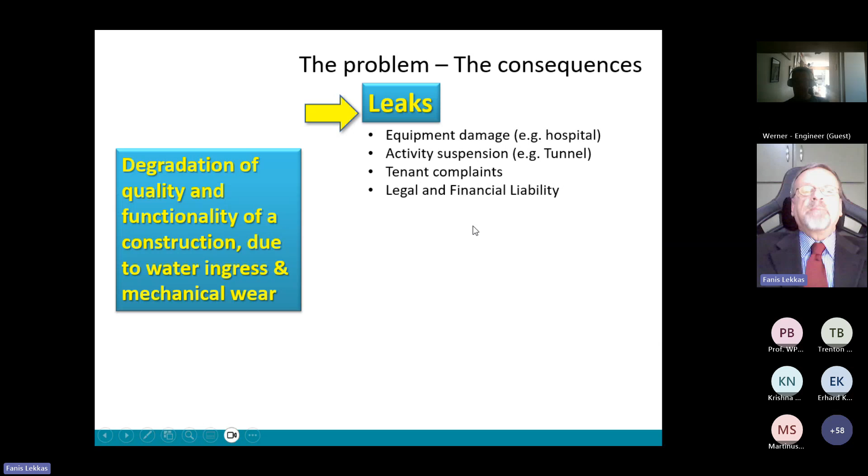A really big problem comes out of the corrosion of the rebar, be it because of carbonization in very polluted atmospheres of metropolitan areas, or chlorides and sulfates coming in on seaside or riverside projects. It is actually the corrosion of the rebar that brings buildings down and puts engineers and contractors to prison.

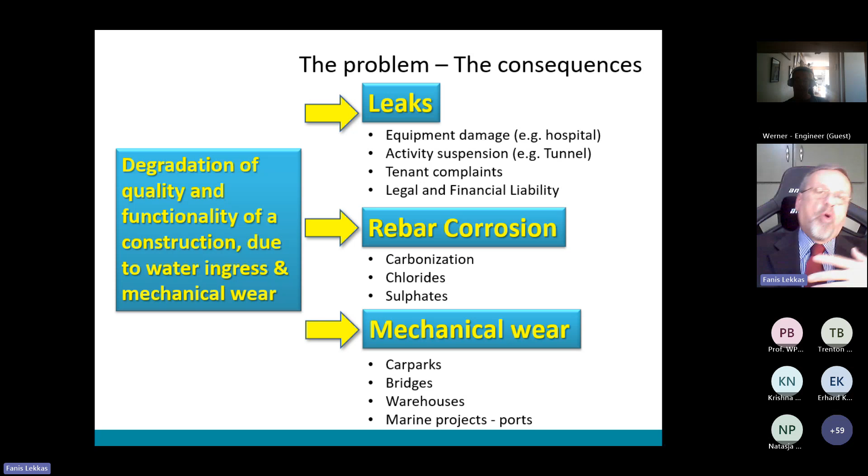And finally, we have the degradation of mechanical wear because of abrasion. Think of car parks, think of industrial warehouses, think of ports and warehouses where containers and cranes are being dragged or dropped, destroying the quality of the surface and damaging, degrading our concrete.

You all probably know that there are three major factors that decide whether our concrete structure is going to be resistant to humidity or not. The first and foremost, of course, being the design mix. So what is in that concrete? How much cement and what type of cement did we put in there? What kind of aggregates are we using?

Are there aggregates that are coming from a river? In some parts of the world, they cannot afford this. They do not have them. So they are bringing in aggregates from the sea sand, from the seabed, and sometimes they do not even wash them. What other kind of admixtures do we have? Are plasticizers and retarders playing an effect? Are we placing concrete in freezing temperatures, so we have to use extra admixtures and so on?

The second, I'd like to say, is the moment of truth: the day of production and placement of the concrete is where most of the mistakes are happening, and they decide the fate of the building. For example, in some parts of the world, it's very easy to get stuck in a half a mile or 1 mile distance for about 2 hours.

Philippines, Manila, for example. So the mixing truck is leaving the batch plant on the way to the construction site, gets stuck in traffic. The driver of the truck is afraid that the concrete will go stiff on him. He presses a button, he adds some water. If you ask him exactly how much water did you put in there, he says, nah, don't worry about it. I've been doing this for 20 years. I know this inside out.

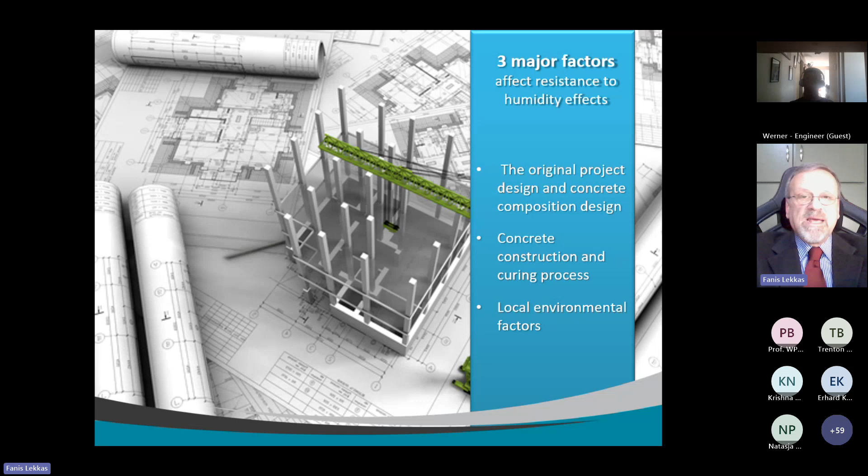Still, we all know that even within the first 24 hours, our concrete is going to be suffering issues that, if we don't plan properly and execute properly, may escalate into problems and then into damage, starting from the very simple and innocent plastic shrinkage or separation of materials, and in the weeks and months to come, between winter and summer and the opposite, we're going to have cracking and shrinkage, and then chemical attack, carbonization and acid rain start to play an issue.

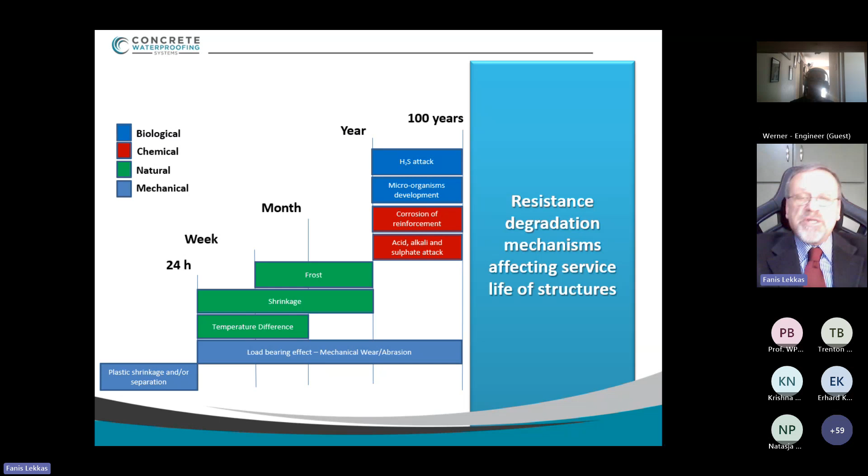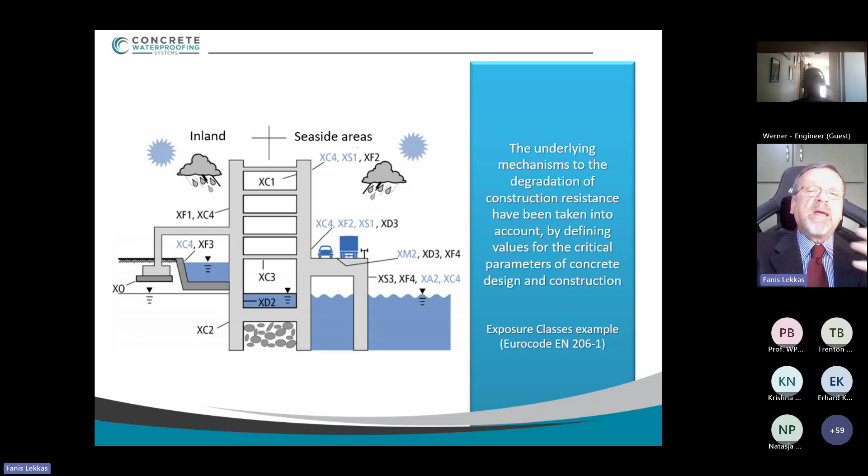This is why the building regulations all over the world, and here we are seeing a slide out of the European building code that is in effect as we speak, have made different provisions about it with classifications of projects, where every type of project, be it inland or by the seaside, above ground or below ground, industrial or residential, a water tank or a car park, is being regulated.

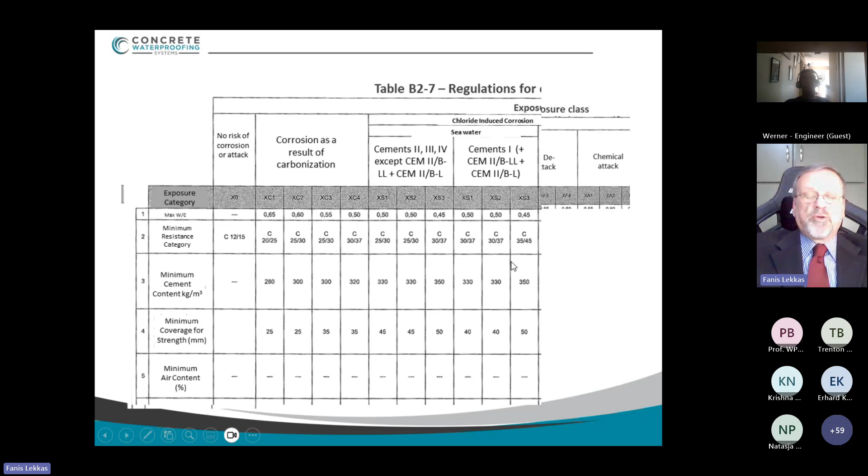Mainly you are expected to give most kinds of information about the project, and then the building regulations will tell you what is the maximum water to cement ratio that you cannot go over, what is the minimum cement that you should not go under, what should be the minimum cover in order to protect the concrete. And we are doing all this. Why? Because we want our structure to achieve a maximum service life.

So let's say that we are designing a hotel or a hospital and we expect a service life of 50 years. What does that mean? Does that mean that it's acceptable for my building on year 51 to die on me and then we have to throw it away and build another one? Of course not.

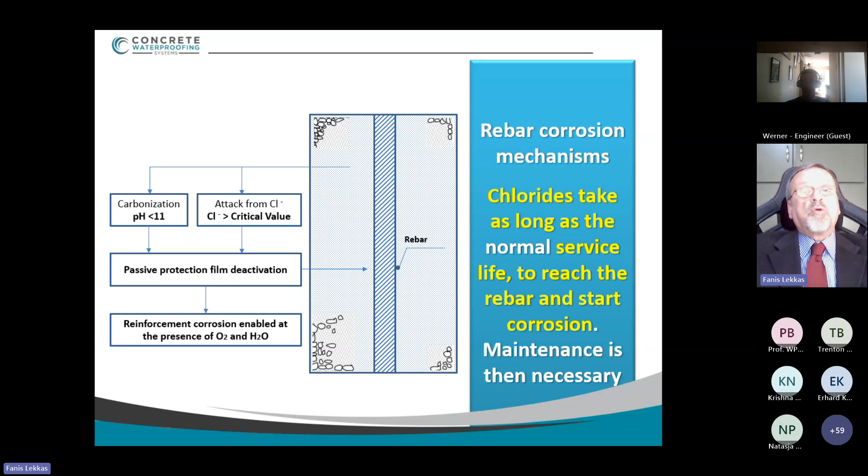It means that we anticipate that with the design mix and placement processes we followed, it will take 50 years for soluble chlorides and sulfates to migrate from the surface through the concrete matrix, get to the rebar, deactivate the passive protection film, and then corrosion will start. Which means that if we are diligent property owners, we should be starting to do preemptive repairs.

So if you think that building regulations will more or less designate what kind of cement, water-to-cement ratio, or even the coverage you should be using for a specific project, the only thing left in our hands to protect the longevity of the concrete is by waterproofing it, by not allowing water carrying soluble chlorides and sulfates to penetrate the matrix.

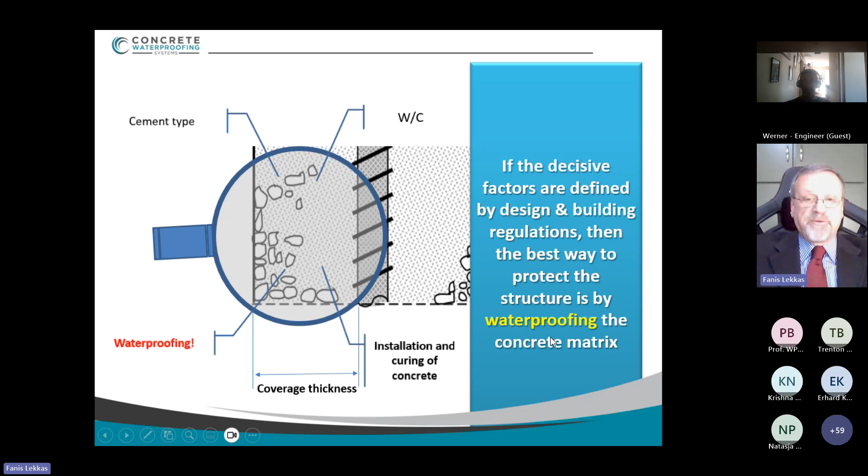So why are we doing all this? To avoid the corrosion. And what do we have in our hands? What are our options? Probably these materials. I'm sure you have all these materials. You've probably used all of them, or most of them, during your work career.

I would really like to know, on a scale of satisfaction between 1 and 10, how satisfied are you? Are you a 1? Are you a 10? Are you a 5? Where are you? Mostly when I speak with people, they tell me between a 4 and a 7. The 7 is really rare. Nobody ever gave me an 8, a 9, or a perfect score of 10.

And when I ask why, they tell me all sorts of things. Usually they talk about service life. They say we install them and in 1 or 2 or 3 years they start leaking. And when we get to the nitty-gritty of this, they're not really complaining about the material. They're complaining about the workmanship of this gentleman, top right, that gentleman, and the other gentleman. It is the workmanship that is causing the problems.

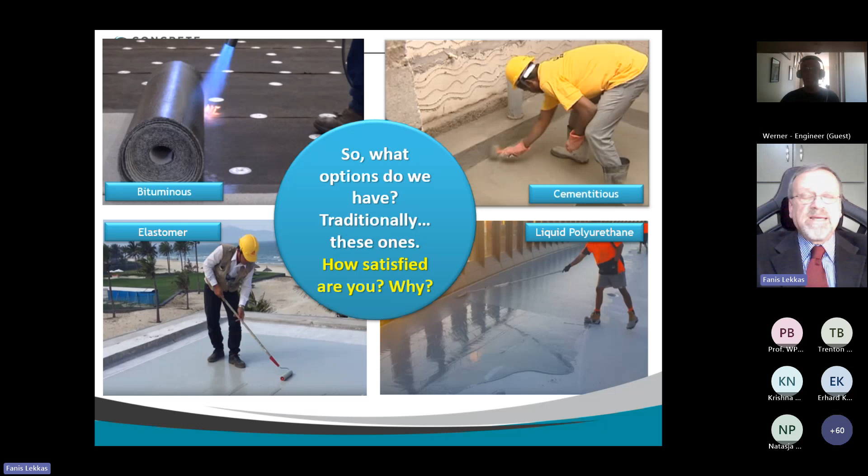Most materials, with the exception of some really bad ones that everybody knows and avoids, could probably last a very long time if installed in a controlled laboratory environment. But they are not installed there. They are installed out in the weather elements, under the scorching sun, the rain, the frost, and the ice, and sooner or later they do fail. So we have to think about what we are going to do when they fail, not if they fail, when they fail. And when they fail, they cause really big problems.

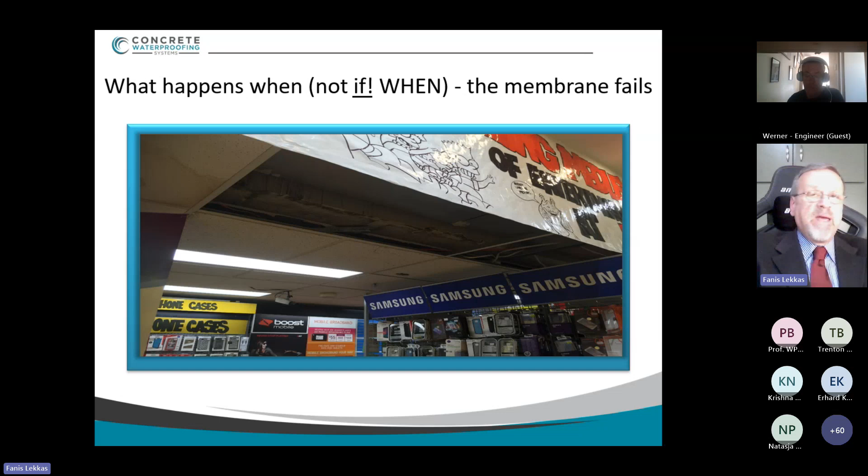For example, this is a shopping mall less than half a mile from our headquarters in Sydney, Australia. They had to close down the mall for 8.5 weeks to make repairs. Imagine how frustrated the shop owners were, losing their income and probably losing their clients altogether, because research shows that when retail customers change the place where they go for their regular shopping, very rarely do they go back.

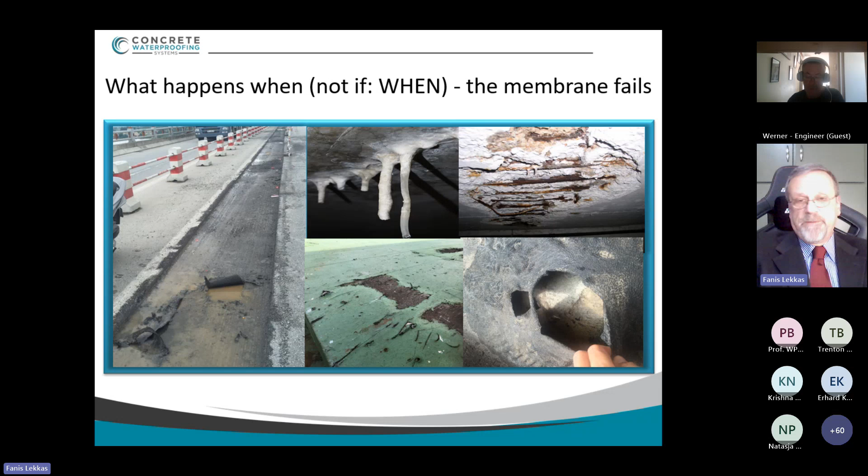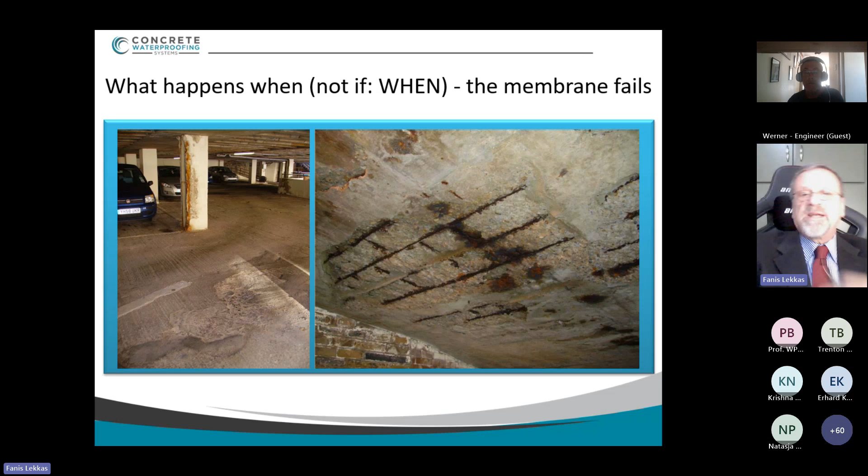So we need to know how we are going to address the issues that the failure of traditional membranes and waterproofing leaves, because after the damage they cause, we still have to repair. You see all these kinds of damages that even after the lawyers and compensations are finished and paid, we still have to pay a lot of money to repair.

For example, if we are talking about a dripping rooftop on a 5-star hotel, which has a membrane, then a screed, and then tiles on top, we have to practically start destroying, by trial and error, different parts of the rooftop to find the leak, until eventually we have to break the whole thing and start it all from the beginning. Then in 5 or 6 or 7 years, you have to do it again, and then again.

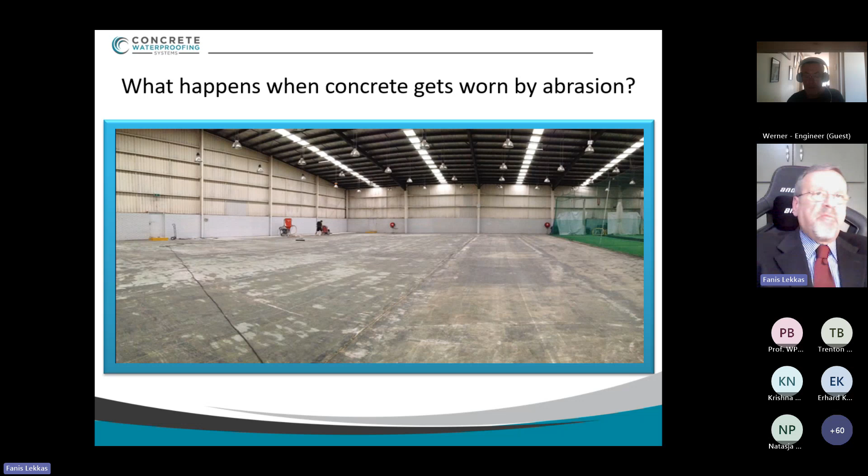So as engineers, we say come on, there must be a way that we can do it better. Or take industrial warehouses, where gradually the surface of the concrete gets degraded by abrasion from forklifts, trains, cranes, trucks, moving traffic, and tools. We need to find materials that we could install only once and never have to pay for again.

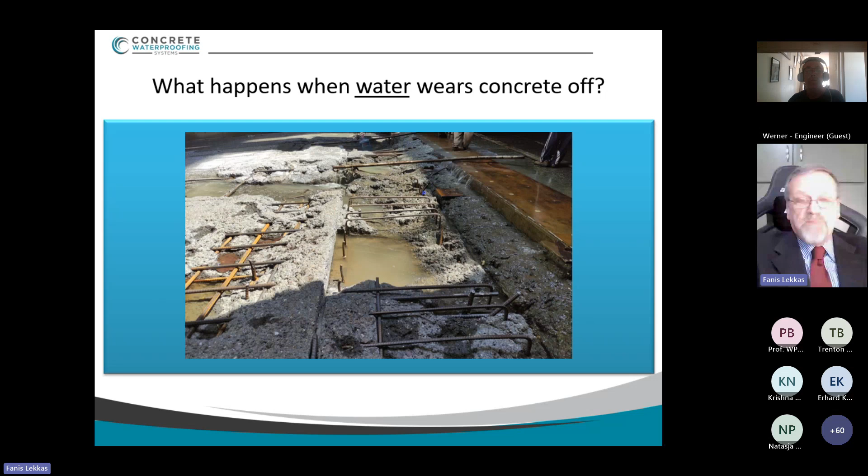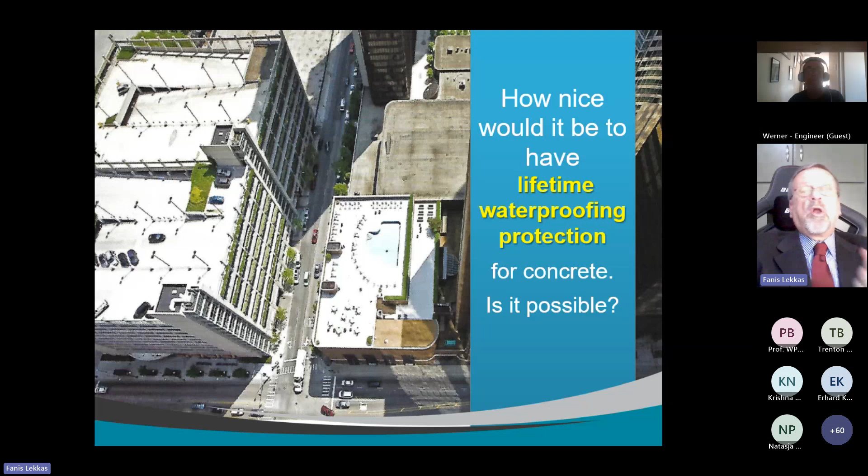For example, this is a spillway on a water dam somewhere in Pakistan, done by a very well-known big construction company. What you're looking at here is the spillway area, which became like this 9 months into the operation of the building. So we say, come on, wouldn't it be great if we could have technology and products that we only install once, and never ever have to install again, and never have to perform maintenance?

And one of these available technologies today, even available in South Africa today, is what we call BMSS, biochemically modified sodium silicates.

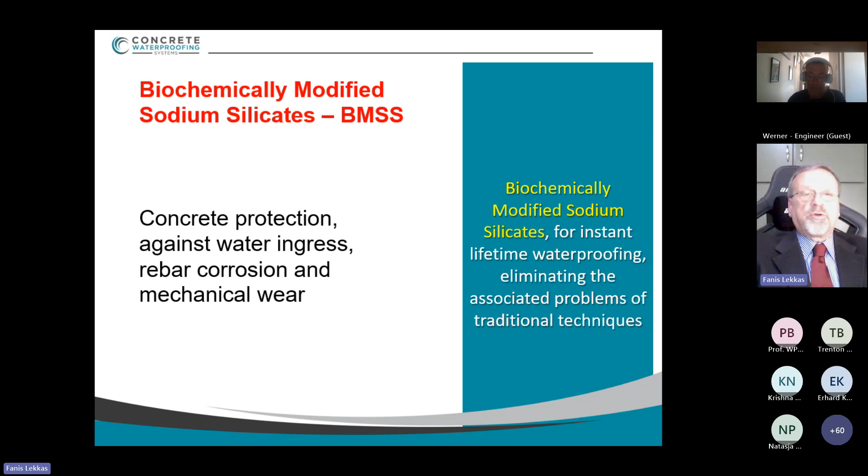Usually sodium silicates are connected to concrete hardeners, something like $1 a liter that you can find around the corner or in every small shop everywhere in Asia. Here we are talking about a biochemically modified technology, which is used not only to arrest the ingress of water, but also to protect the concrete against mechanical abrasion.

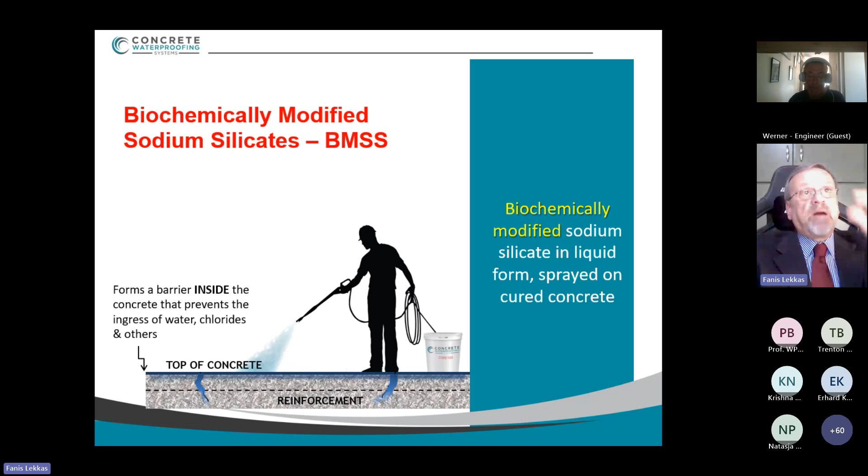BMSS is practically liquid CSH. You can think of it as liquid concrete within concrete. We apply it on dry and cured concrete surfaces, and then we give it time and it penetrates the concrete. It does not stay on top, it's not a coating, it's not a membrane, and certainly it is not a film. It penetrates about 15-20 millimeters of the top surface that we apply it on, and the way that it works is very simple.

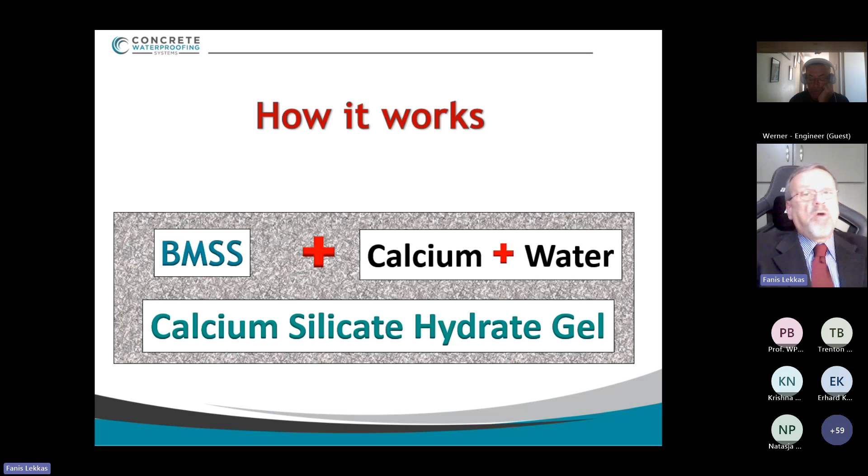It reacts with the calcium, which is already in the concrete, and with simple water that we add by watering the applied area on the day of application, on the second day, and on the third day. And it creates an insoluble calcium silicate hydrate gel. It has the same structure as concrete, which is essentially a calcium silicate hydration product.

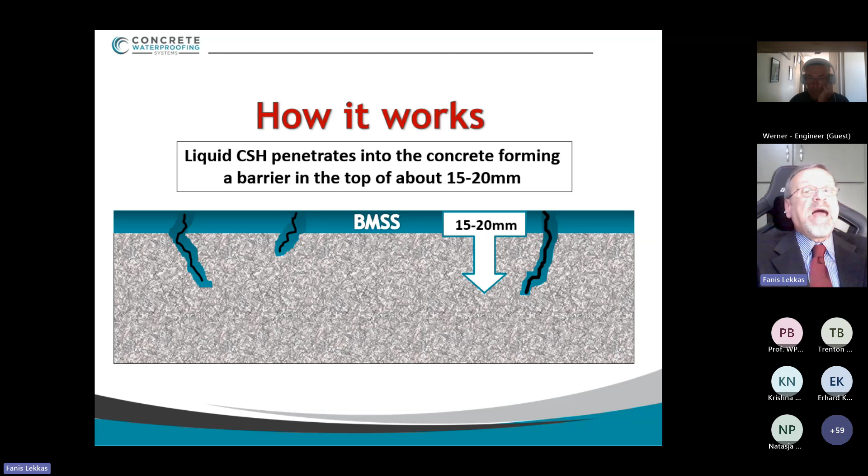What it does is that it seals the porosity of the capillarity of the concrete on the top. It seals the cracks, it seals static cracks which are already in the concrete, and this is all happening inside the concrete and not on top of the surface. The best of those materials can even seal static cracks up to 2.2 millimeters, which is a huge achievement.

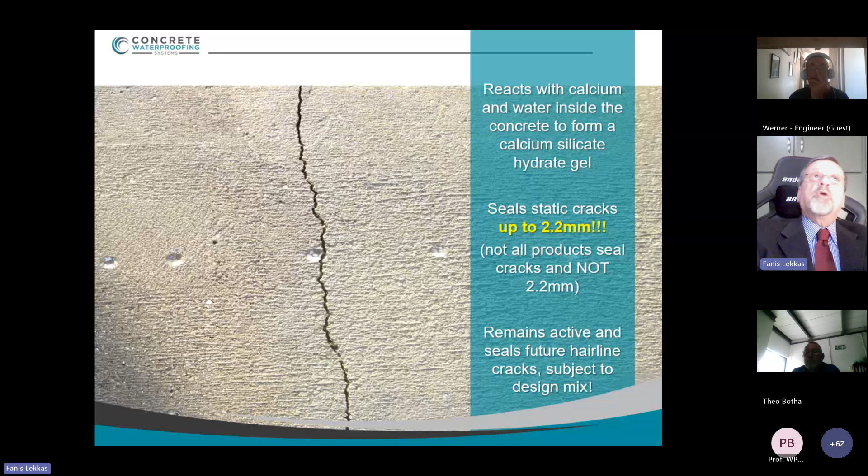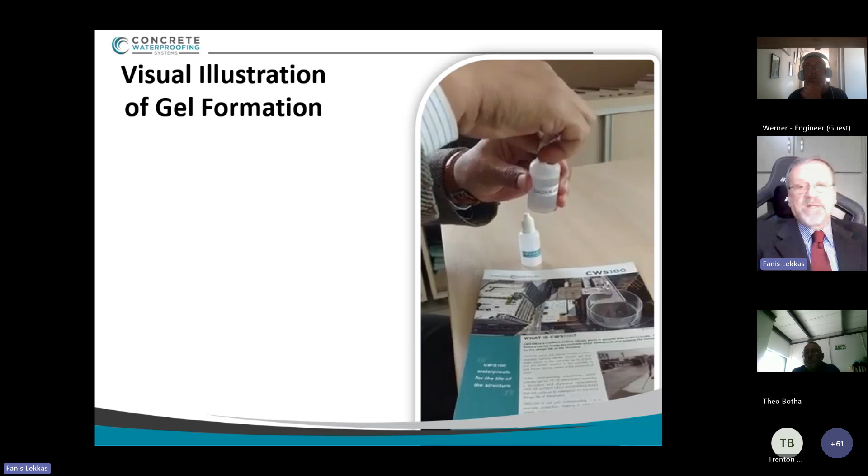Here we have a solution of calcium acetate, some water and calcium to simulate the concrete surface. We put a few drops here in that Petri dish. And then we are going to install the CWS product, which is that demo bottle you are seeing back there.

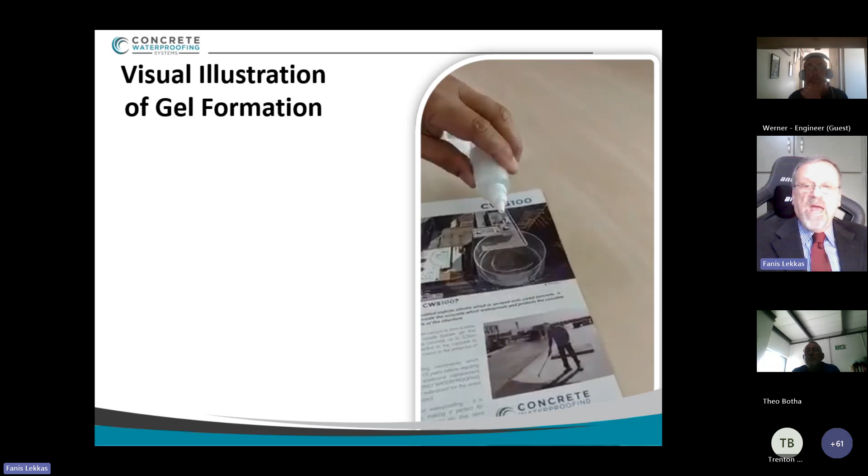You see that these products are liquid, transparent, pretty much like water. The viscosity is pretty much like water. Now have a look. The first drop goes in. Look, 1, 2, 3. You get an instant reaction.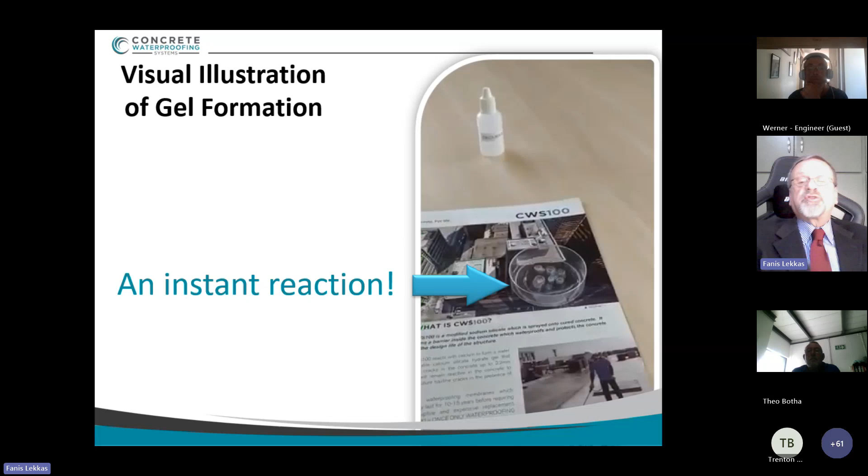The gel formation starts instantly, and the gel starts to grow 5, 6, 7 times its size. Look, in less than 10 seconds, 12 seconds, it grew 5, 6 times its size, absorbing all the available water.

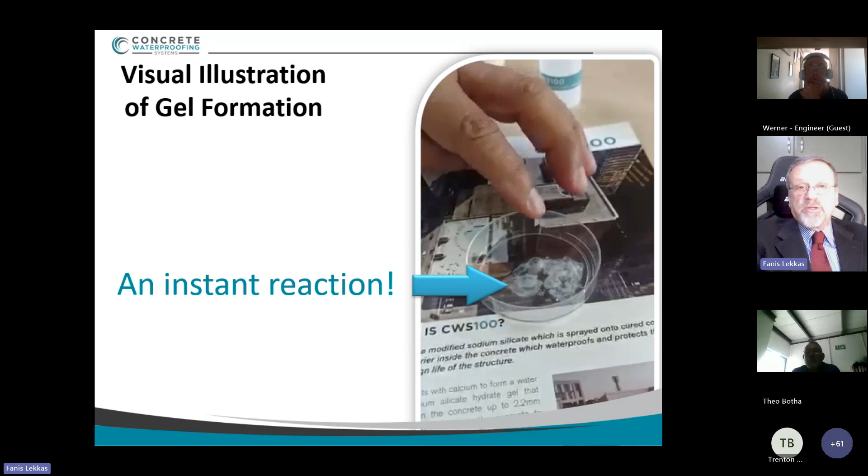This material is not hydrophobic, it's not a water repellent. On the contrary, it is highly hydrophilic material. It loves water. The more you give it, the better it is. However, it's not a magic spray. It has some limitations. It's not a nanomaterial. It is practically a liquid concrete material.

We apply it on structural concrete with a minimum of 20 MPa, well vibrated and well compacted, no honeycombing, no drummy concrete. We apply it when the surface is dry and cured the full 28 days.

Let me explain why. Obviously it has to be dry because, as you saw, this gel formation starts instantly. So if the concrete is damp, is wet, then the gel is going to form outside the concrete without waterproofing it, only staining it badly, and then we have to remove it.

Now, we prefer our concrete to be very well cured the full 28 days because during the curing period, the concrete tends to crack. So if it's going to crack, good. Let it crack all at once, because then we are going to apply this biochemically modified sodium silicate, and it is going to take care of all those cracks.

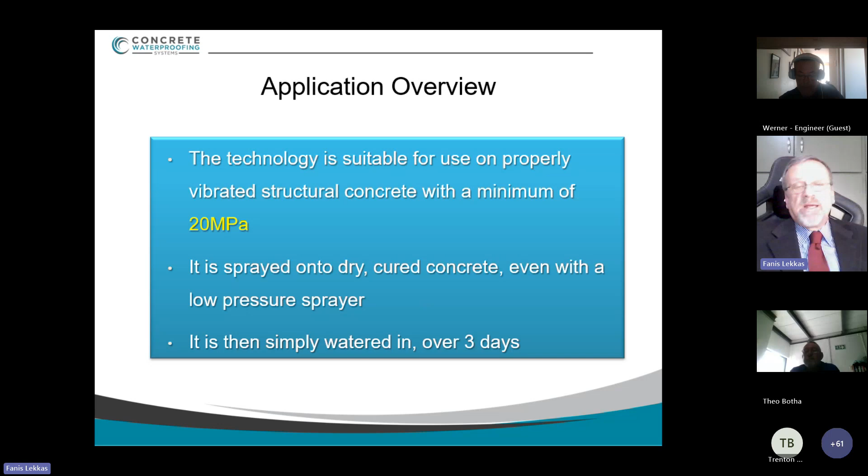After we do the first application, and in the first 1 to 3, 4 hours, our surface becomes touch dry, we water it abundantly for the first time, then the second day and the third day.

The application is very easy. We do not need to use some specific, very sophisticated and expensive equipment. Even a normal backpack sprayer, not even motorized, the one with a manual spray, will do. We apply on the concrete, it becomes wet and then disappears, leaves no trace, does not change the texture of concrete. We start watering abundantly.

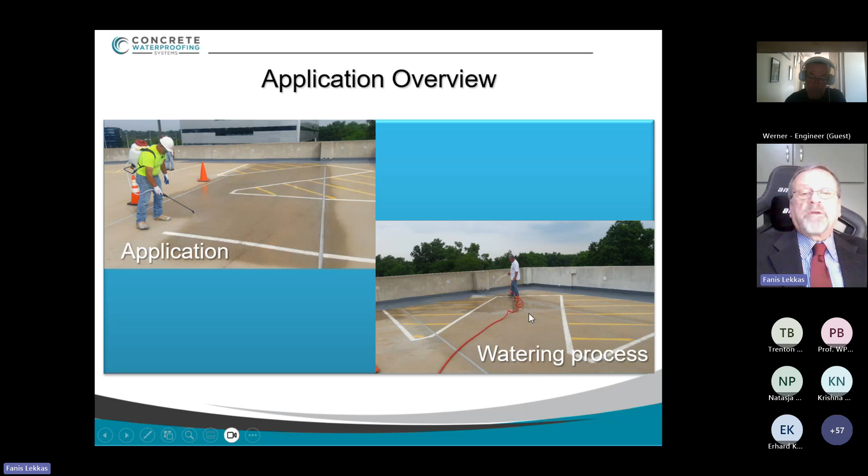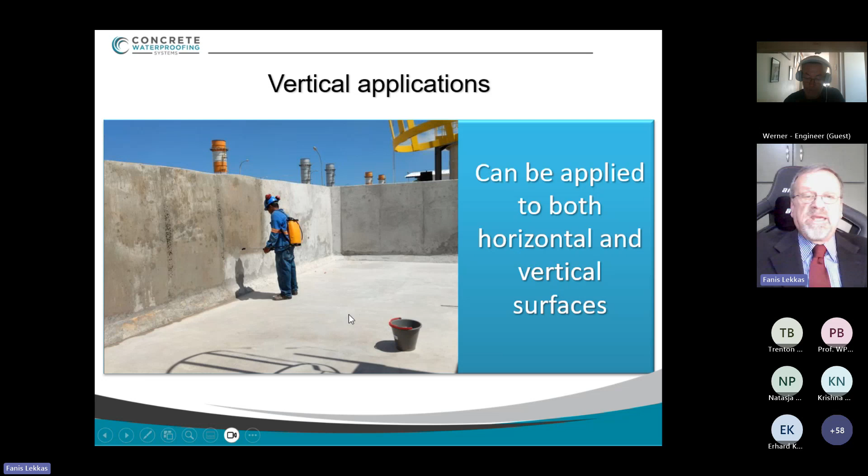This material is absorbed into the concrete matrix because of the capillary phenomenon. So we apply it not only on horizontal surfaces, rooftops, balconies, podiums, bridges, and car parks, but also on vertical applications, for example facades of buildings, water tanks, wastewater treatment, every system where we collect and distribute water, planter boxes like the one we're seeing here, rooftop planter boxes, swimming pools, etc.

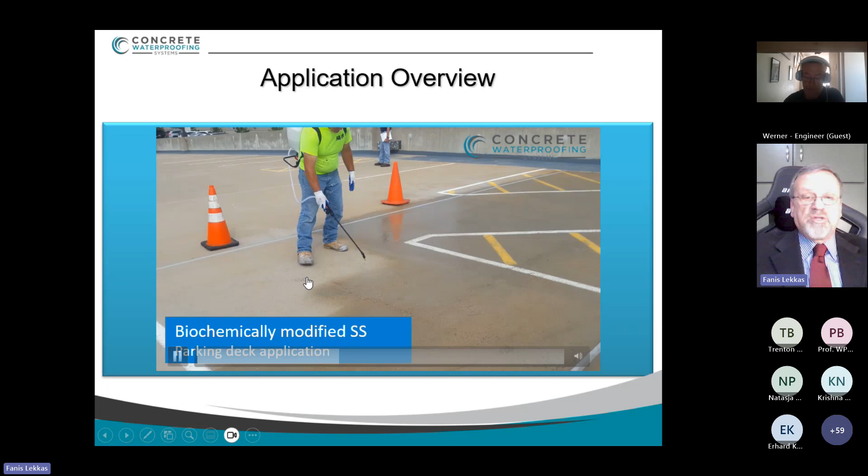It's really very easy to use, and the short video you see here is just to show you how easy it is to apply. You just have to make sure you do not leave any untreated areas. Really very easy to use.

Now, the incredibly valuable asset for contractors is the very fast application. You all probably know that if you're installing bituminous membranes, torch membranes, you need one applicator and one assistant to install, let's say, 50, 60, 70 square meters in a day.

If we're talking about liquid PU, you probably would not be able to go over 100, 120 square meters per day. This technology, used with a normal backpack sprayer, allows one applicator to waterproof 1,000 square meters in one day. And if he's using a motorized pump, he can easily apply 6,000 square meters in a day.

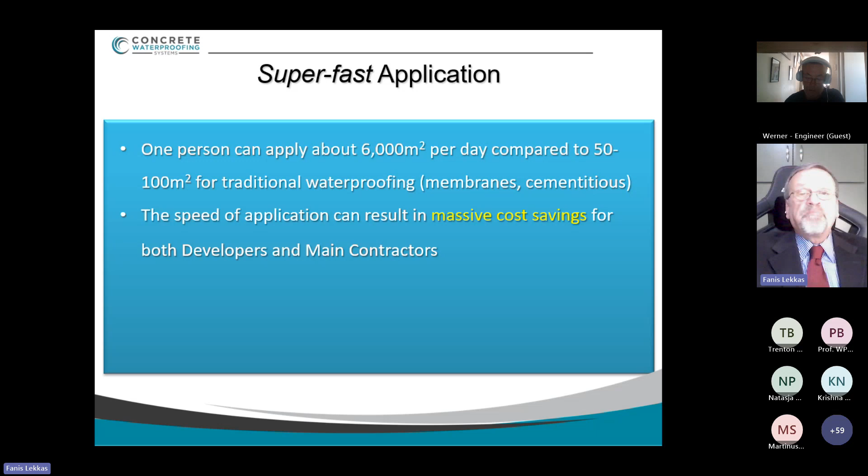Think about the implications. The contractor can now send out one applicator to do the job of 30, in a fraction of the time that 30 people would need.

Look at this example. Let's say we're talking about a bridge project, or a marine project, a port, 100,000 square meters. If you try to do that the traditional way and protect the concrete, it means you have to stay on that bridge for 4.5 man-years. Or you allow one person to do it all in 3 weeks.

Of course, you probably wouldn't send one guy to go there and do it and come back in the year 2030. No, you would still have 10 or 20 or 30 or 50 people working, but those people would account for a total of 1,400 man days.

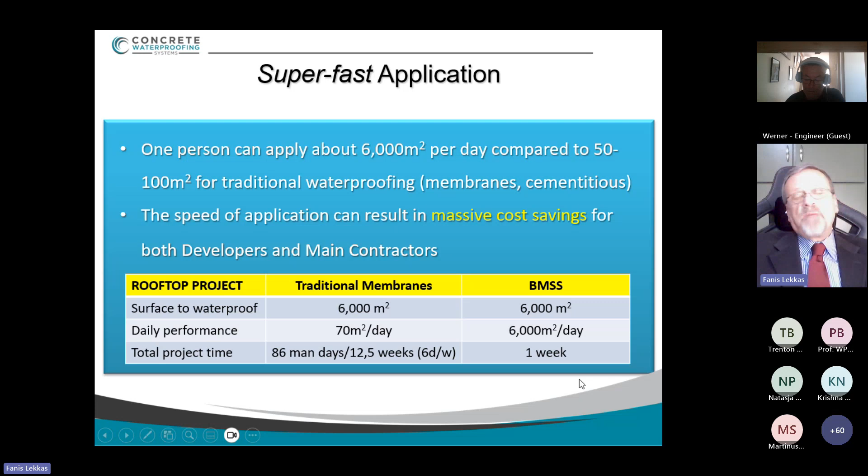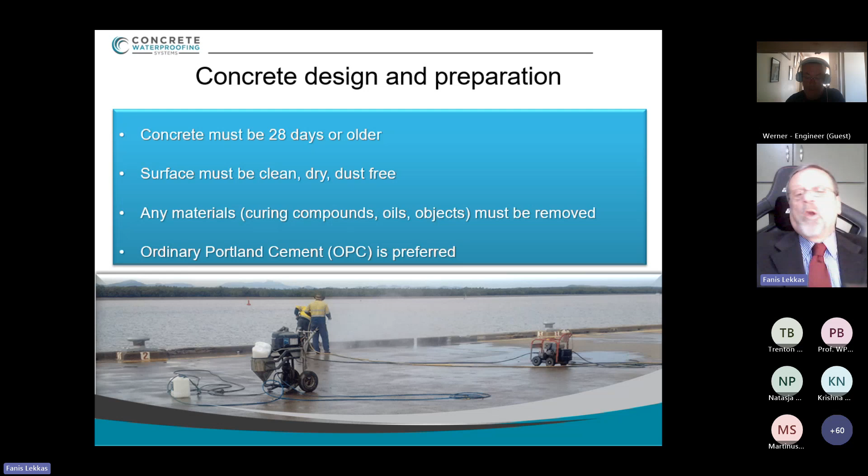So anything that blocks penetration needs to go. We want our surface to be clean, with open pores, free of anything that may block penetration - curing compounds, paints, oils, and other contaminants, they have to go.

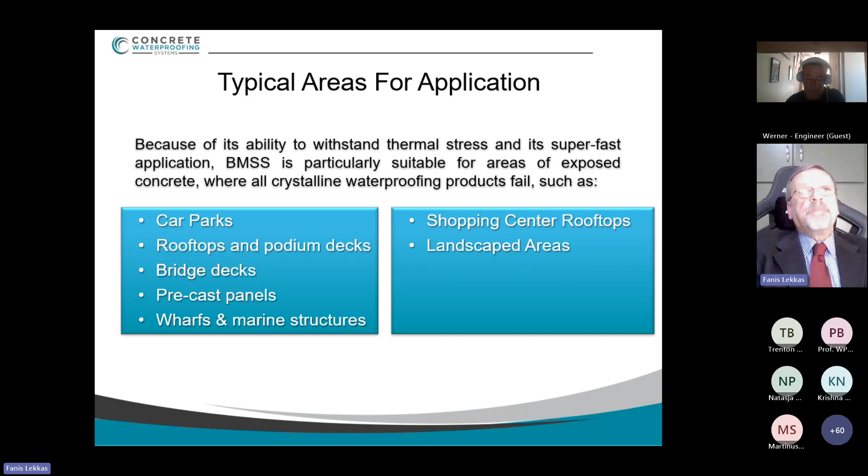This technology also allows the concrete to accept thermal stress up to 160 degrees. Imagine that after you treat concrete with this material, with this technology, you can apply hot asphalt of more than 160 degrees directly on the concrete without first needing to protect it against thermal stress, without a protective layer, topping, or a screed.

So think about it. You can apply up to 6,000 square meters in 1 day with one person, and it can even accept hot asphalt. So what is the ideal place to use it?

Large areas of exposed concrete. So car parks, rooftops and podiums, bridges, all sorts of marine structures, wharves and ports, shopping center rooftops, green rooftops, landscaped areas, and every kind of system where we collect water, treat it, filter it, clean it, store it, and distribute it to the public. So water tanks, swimming pools, aqueducts are all equally good applications.

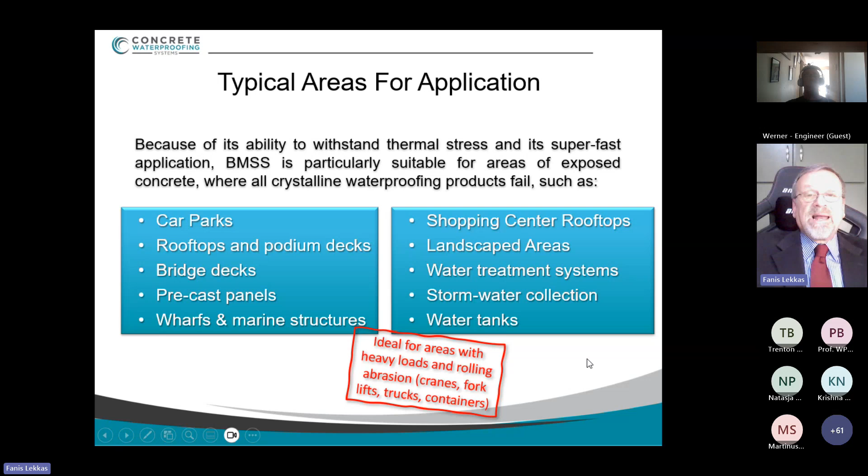And as you see here, I'm stressing that it is ideal for areas exposed to mechanical abrasion, like warehouses, ports, and bridges. So all these projects we see here are great to be treated with this innovative technology.

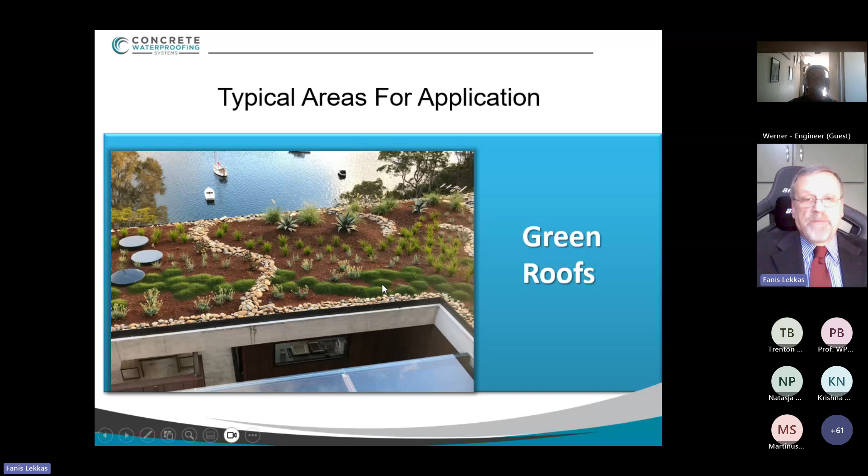And because I mentioned water tanks, let me tell you that this technology has been certified by multiple international certification boards around the world for safe use with drinking water.

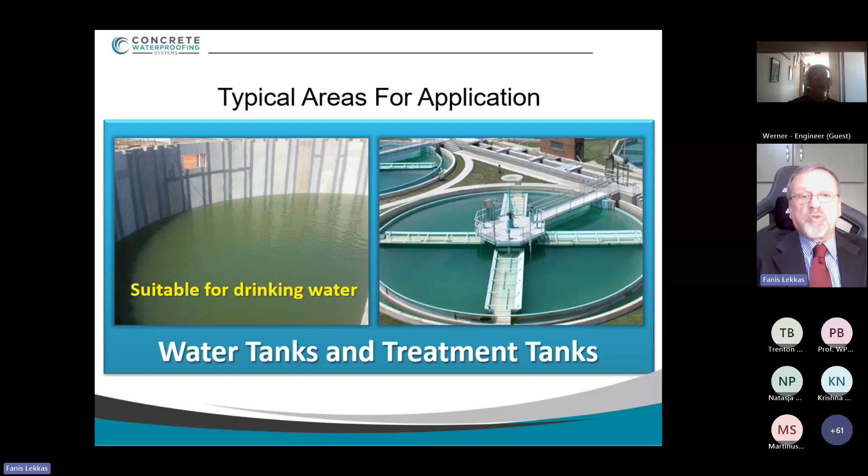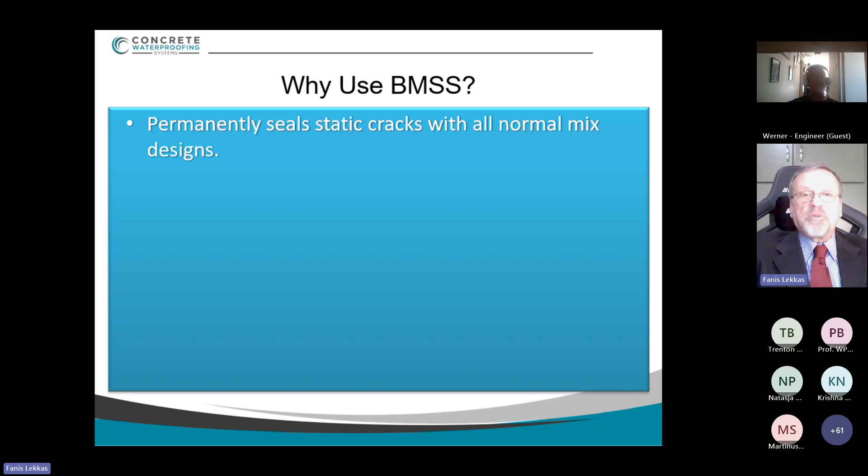So why should somebody consider adopting this new technology? Because first of all, it will automatically seal static cracks up to very big widths without other human intervention, without using epoxy resins, injections, and things like this.

And then, as long as there is free calcium in the concrete in the future, in case the concrete might develop a future static crack - you know, sometimes we have such high temperatures around our world nowadays that concrete even 5 or 6 or 7 years old has been known to present shrinkage cracks, because of expansion and contraction under very high thermal stresses.

So if there is free calcium in the future, this technology will even seal a future static crack. Now, in case we really want our project to enjoy future crack sealing, we generally try to avoid pozzolanic materials like silica fume, microsilica, or fly ash in high percentages, because they tend to block the free calcium.

So we can limit these pozzolanic materials to around 8%, because generally we use them to make the concrete more dense and waterproof, right?

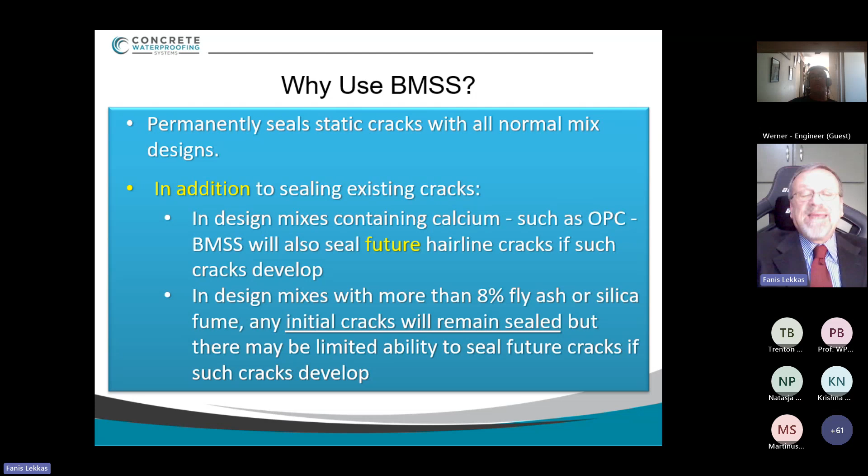So we don't have to use so much. We can take them away altogether, or if the consultant definitely wants to use it, it's okay to use up to 8% of these materials without any issue affecting the future crack sealing.

On the contrary, the gel will stay there, protecting the structure from water and soluble chlorides and sulfates for the life of the structure. I've already talked about withstanding thermal stress, and the static crack sealing ability of this technology can even reach up to 2.2 millimeters. Well, naturally, not all products will do that, but they will seal static cracks, okay?

Sealing the porosity of the concrete completely means that we are essentially protecting the steel rebar against corrosion. That means that you can even take the corrosion inhibitor out of the design mix. Some consultants say, is this a corrosion inhibitor? And we say, no, it's not a corrosion inhibitor. The corrosion inhibitor is just an admixture that will wrap around the steel rebar, protecting it passively against chlorides. Here the technology is different. It is the porosity of the concrete which is completely shut off to the entrance of chlorides and sulfates, which means that you do not need to use it.

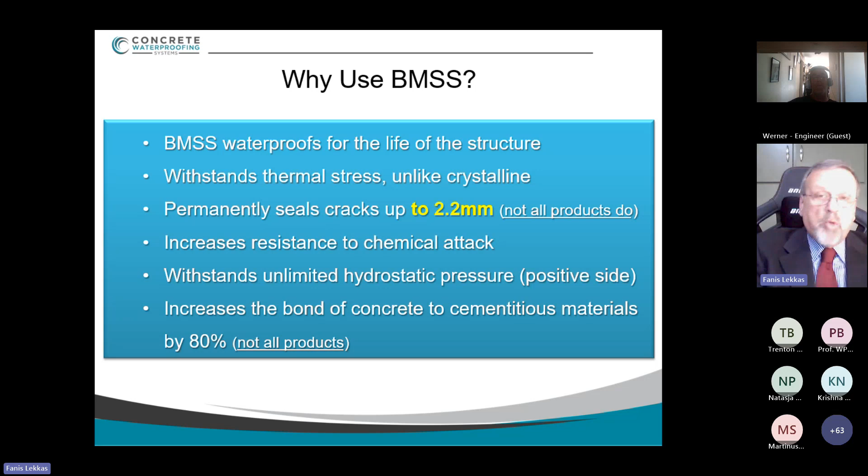Then again, this technology has a peculiar effect on the pull-off strength of concrete. It increases the pull-off strength of concrete between 27 and 80%. That means that if you are using subsequent layers of materials, tiles or marble plates or what have you, by using a cementitious glue, the bond of these subsequent layers on the concrete surface is now going to be between 27 and 80% stronger than before, which means longevity on coatings of buildings, for example, on facades of buildings. In several parts of the world, we tend to cover the facades of buildings with tiles or big marble plates. And so this is one more reason why somebody should think of adopting this technology.

Now, thinking construction and what that would imply for construction, think of this. Most of you that may be dissatisfied with the traditional materials that we were talking about earlier, we have been attributing this to human error, to workmanship, right? And of course, if you're going to do, for example, PU membranes, you have to very precisely mix specific proportions of materials, and then you have to apply 3 coats, one on top of each other, less than 2 hours apart at specific layers, and of course human error is sooner or later bound to happen.

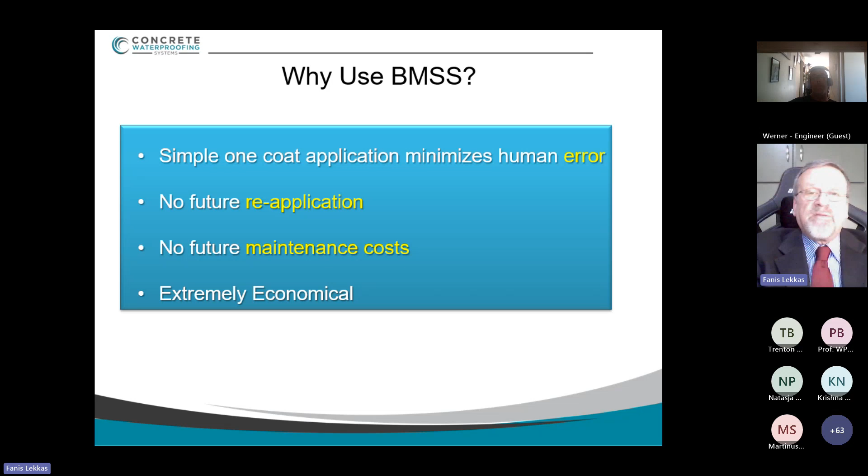Here, as you see, we're talking about a very simple application, a simple spray application on the concrete. We give it time, it goes in, the surface becomes touch dry, we water 3 times, very simple to use. Good technology should be simple. Good technology should be problem-free technology. And this is what we're talking about. We install once, we never ever have to apply again in future. The project owner can eliminate the waterproofing cost out of the future cost of use of the building, which at the end of the day makes it much more economical than any kind of traditional waterproofing.

Then again, talking about the contractor, you know, we rarely think about it. The contractor got the job. Why? Because he gave the rock bottom price. And then he needs to find ways not to waste more money and to make some profit out of the rock bottom price that he gave. So let's think in contractor terms.

Usually, you may know, I hope, that most of the traditional waterproofing membranes, bituminous, torch, PU, whatever, they get destroyed either during the application or on the last day that the crew are packing up. So they're finished, the foreman says, okay guys, we're done, pack it up, let's go home. So they start picking up all the tools and all the extra materials and the remaining. Somebody accidentally drops a hammer, or he's dragging a 2 kilo aluminum ladder. He's nicking the membrane just a little bit, not enough for our eye to see it, but the scratch is there.

Then we cover with the screed, the first rains come in and it starts leaking. This material cannot be damaged by subsequent work because there is nothing left on the concrete surface to destroy. We send one applicator to do the job of 30 applicators in a fraction of the time.

And of course, if you can go up to 6,000 square meters per day with one applicator, it means that obviously the deadline that you are given is very easy not to miss. You need much less time than the traditional time you will be given, which means that the contractor does not have to worry about paying liquidated damage claims, delay compensation to the contractor, or the contractor to the project owner.

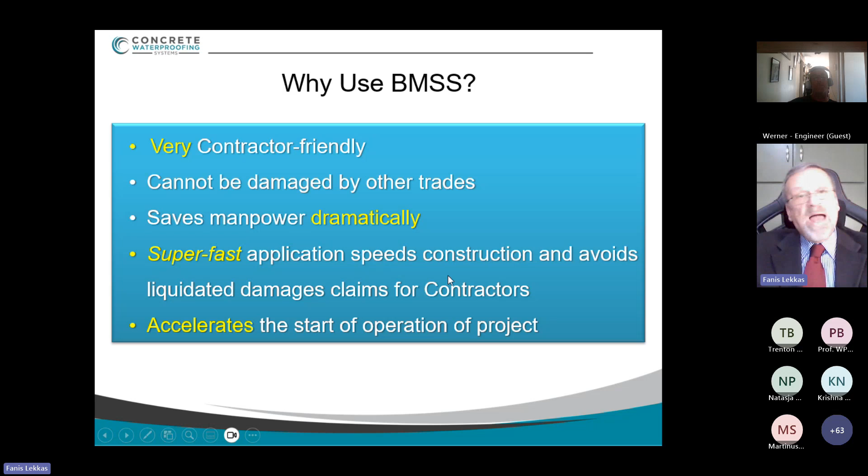And of course, going to the owner and telling him that you finished that project 1.5 months earlier than he anticipated, I guess would only make him happy, right? That's a little bit more about technical stuff. This technology being underneath the surface of the concrete means it does not change the friction coefficient of the surface, which means it does not become more slippery as happens with some normal concrete sealers and hardeners.

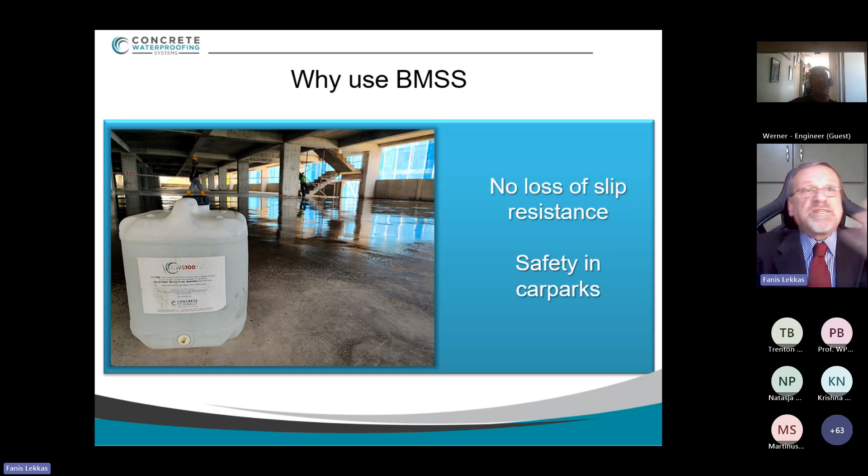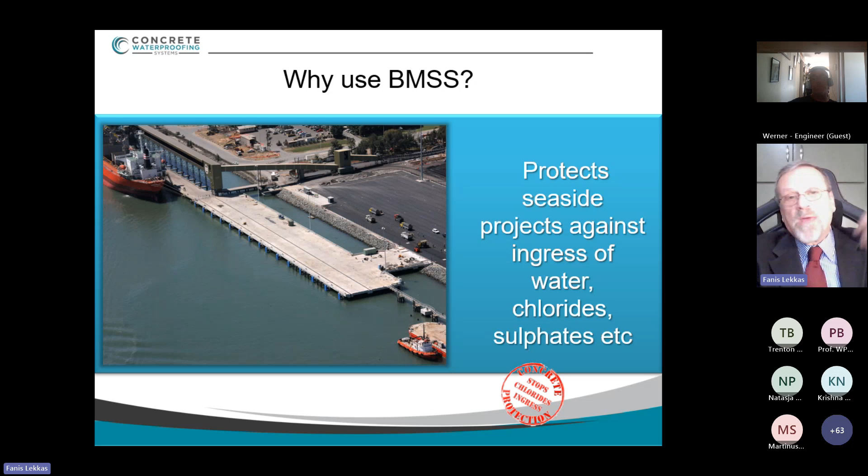And this is not only safety in car parks, as I'm saying here, but also safety in areas of pedestrians, where people, like children, are playing or running, or ramps for people with disabilities. I've already discussed the protection against chemical attack from chlorides and sulfates. And you know, generally people think that seaside projects are really risky, while riverside projects are generally more safe. But you never know what kind of contaminants are coming down from industrial waste from factories which are upstream, right?

Finally, and very importantly, this technology, when applied on concrete and properly watered in for 3 days, then 7 to 10 days later, the formation of this gel has concluded. And as a result, the surface has increased its concrete hardness up to grade 9 of the Mohs scale. Think about it. Granite has a hardness between 6 and 7, 5.8 to 7, depending on the geography that we mined it out of.

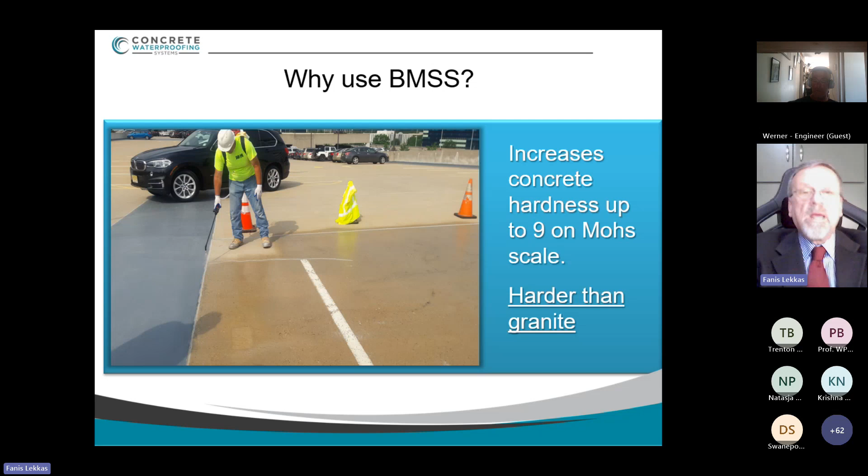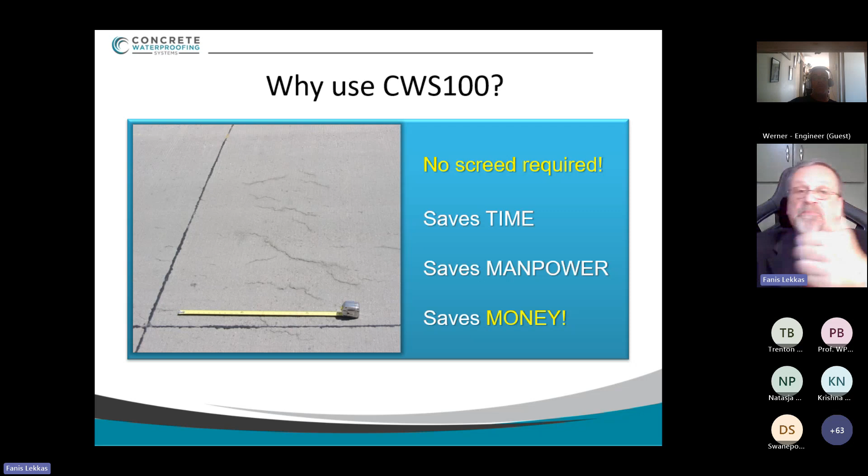So that means that now we have increased the concrete hardness to a much higher level than granite, and this in plain English means that we do not need to use a protective screed to protect the waterproofing. Normally, on top of an area that we have protected against moisture with a bituminous membrane or a torch membrane or PU, or cementitious, we have to install a screed to protect it, right? Here, you don't need to do that. You fully eliminate this phase of the construction, which means you save the money, you save the material, you save the time, everybody wins.

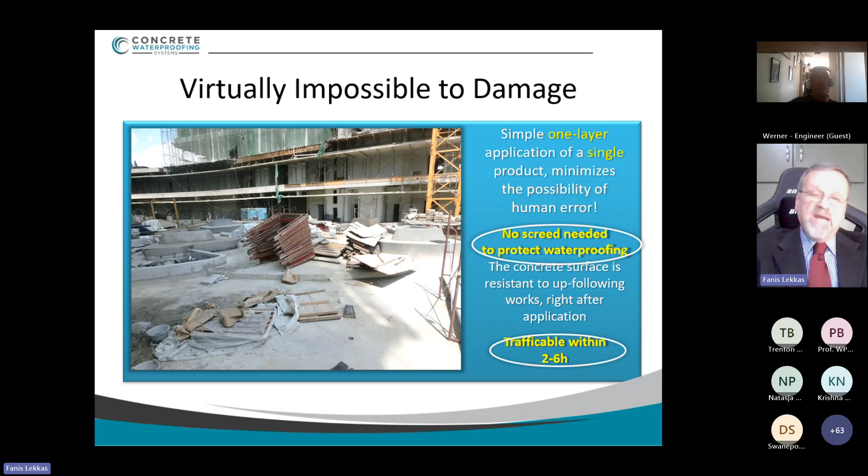For example, this is a podium in a high-rise building in Surabaya, Indonesia. After this area was done with CWS 100, they brought in the materials that they were going to hoist up on higher floors to continue the construction. Would you ever allow anybody to do that on top of your membranes, no matter what kind of membrane you have, even polyurea, which is really expensive? You would be crazy, because that would be damaged. But here, there is nothing left on the concrete surface to damage because this technology is working below your concrete. Actually, after the first watering has been done on the first day, the area is fully trafficable.

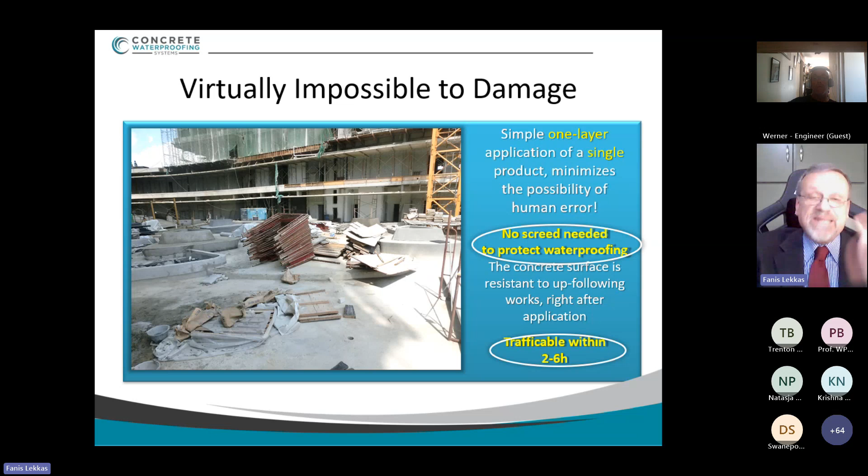So let's say we have a car park. If you want to re-waterproof a car park with the traditional means, the first thing you have to do is close the car park from business for, I don't know, 2 weeks to 2 months, right? Here, you don't have to do that. You just segregate, let's say, 500 square meters of the car park while the rest is in operation. You apply the product, you give it time to penetrate, you water it. You open the area for business. You move to the next 500 and then the next 500, so we can re-waterproof and re-protect projects while they are still in operation, generating income for their owner.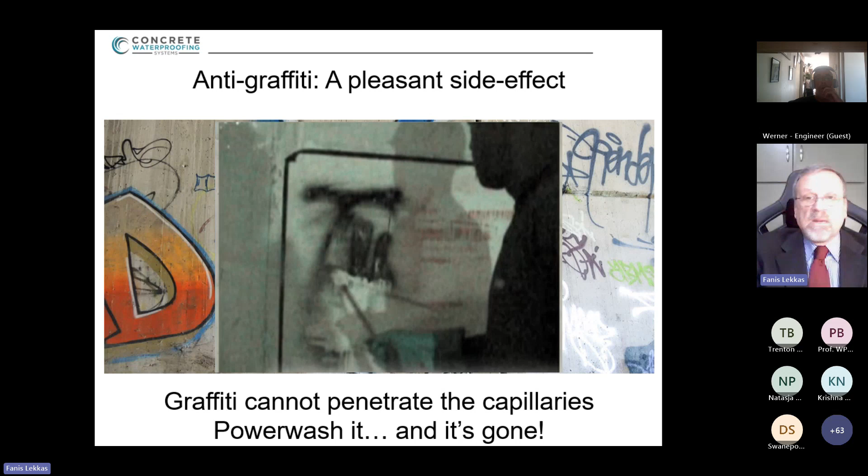Granted, there are normal anti-graffiti films, but in a place where they tend to smear very often, for example a wall of a building or a stadium where the people of the teams go and smear graffiti, you have to clean it off and brush it off every other week. So after you do that for 2 or 3 months, you have to apply the anti-graffiti membrane again. Here, you never ever have to do it again.

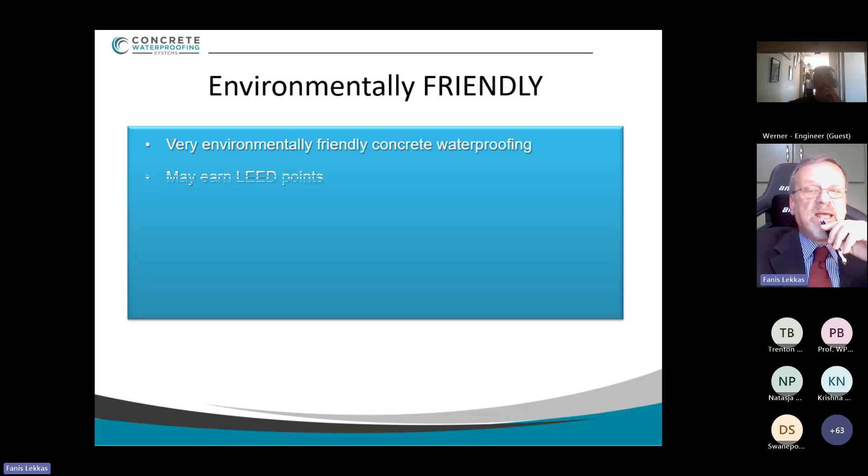Finally, let's talk about the protection of the environment, because South Africa is one of the most advanced countries in construction. Let me tell you, it's one of the greenest materials that you can find in building today. Completely atoxic, zero toxicity, zero carcinogenic materials, zero volatile organic compounds, and as we said before, absolutely safe for use with drinking water.

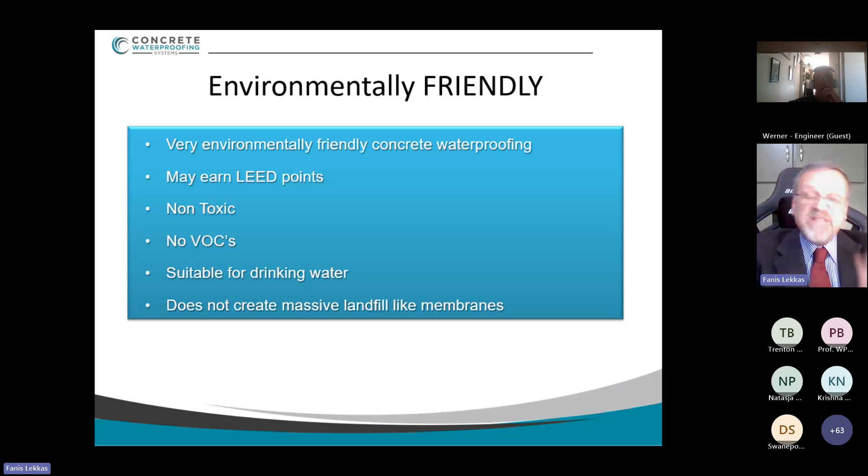And then again, think in contrast what we do with membranes. When the time comes where the membrane is going to fail, we take away the membrane, and then what? We cannot throw it in the garbage of the house, right? Because they are toxic. We have to put them on a truck, drive far away to a designated landfill, and dump them there. But here you don't have to dump anything. On the contrary, when the time comes to bring the building down, this concrete is fully recyclable, okay? Whereas the membranes are really not friendly for the environment.

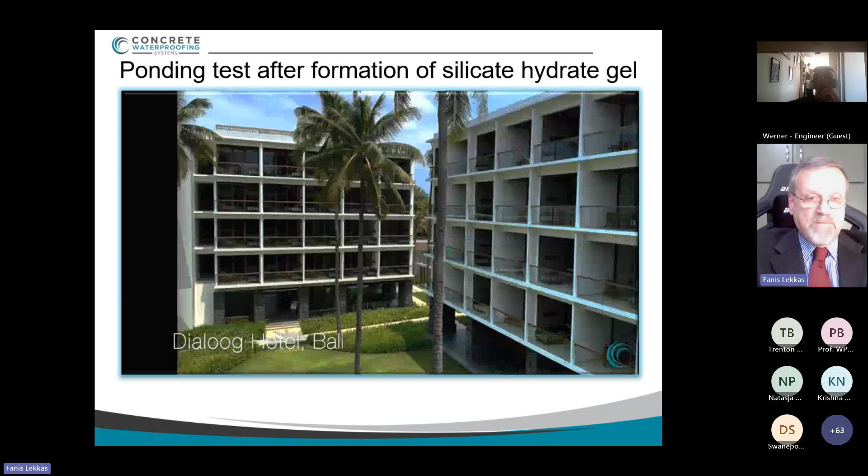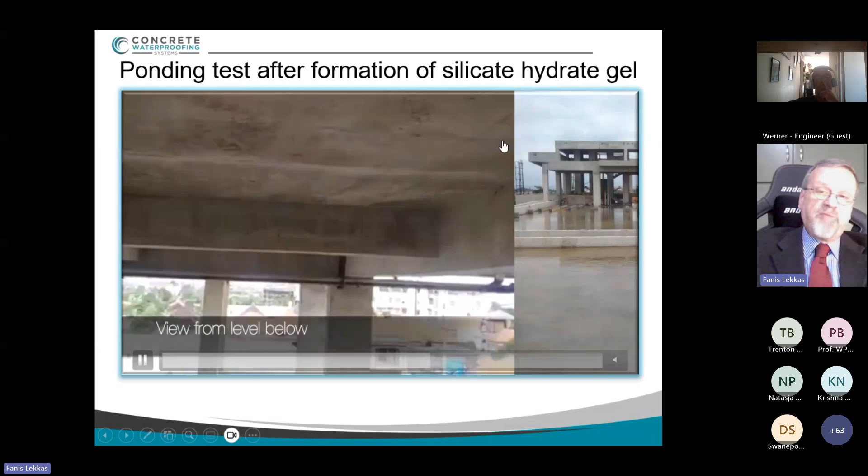Let me share with you, because talk is good and talk is easy, but let me share with you a video to show you in action. This area that you see here is the rooftop of this hotel, Dialoog Hotel in Bali. This is 2,380 square meters. Now look, the camera will go down. As you see from below, it is completely dry. No other application of other technology, just the BMSS, biochemically modified sodium silicate.

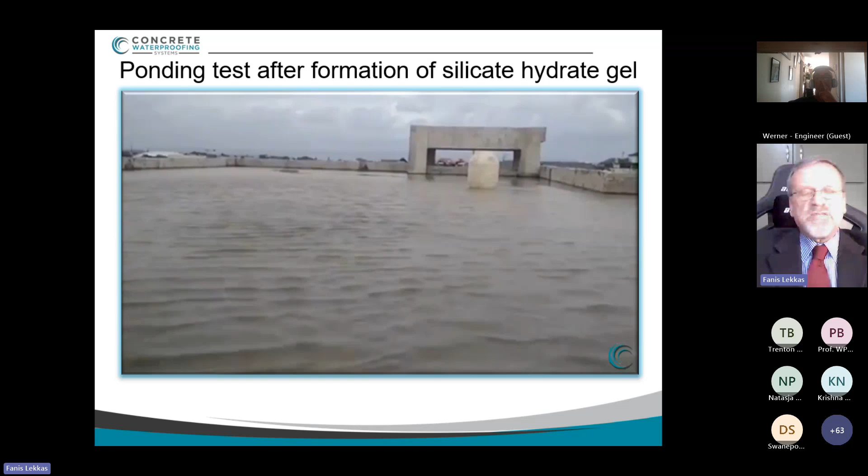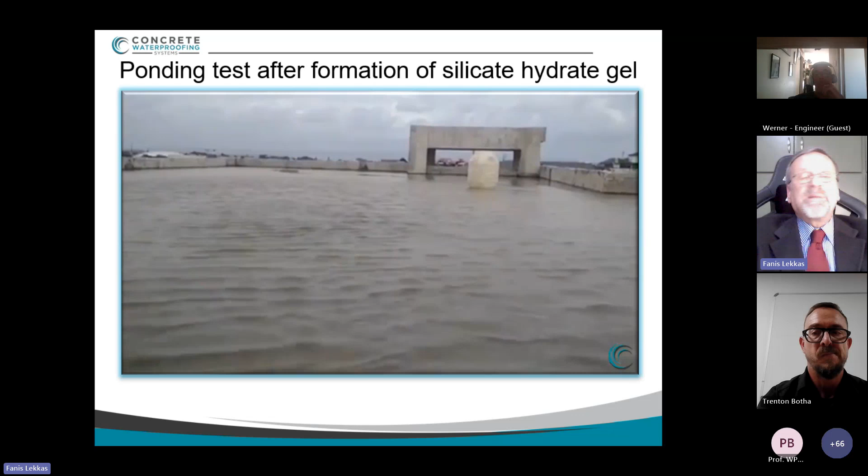Impressive or not? And you know what? The real impressive thing is not that it's not dripping, because this is what this technology is about. The impressive thing is that those 2,380 square meters were done by one applicator with one spray and 3 waterings in 4 calendar days. How many people would you have to use with your team to finish it, and how much time should they be using?

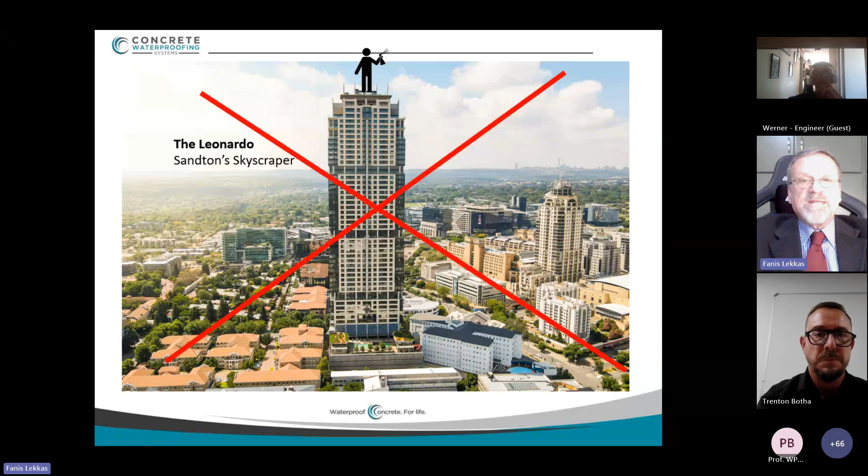Now, I may mislead you and give you the impression that this is a magic spray. So obviously you cannot go up to Sandton's skyscraper with a couple of bottles, spray BMSS in the air, and the whole South Africa becomes waterproof. No, by no means. But if you compare this technology with traditional membranes, this is light years ahead. All this kind of traditional waterproofing has a limited lifespan. Sooner or later it will fail.

Here we're talking about lifetime problem-free waterproofing. We don't have to apply in future. It cannot be torn, it cannot be scratched. You don't have to worry about UV radiation. You don't have to worry about root penetration. You don't have to worry about the number of the coatings, the thickness of the coatings, the adhesion of the coatings. You don't have to worry about safety for use in swimming pools for children and families, or drinking water.

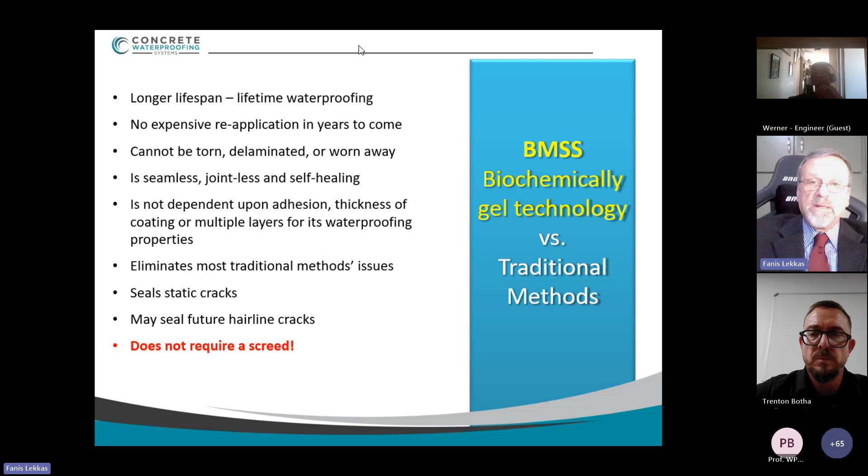It will seal static cracks, current and future, does not require screed, and generally stays there forever. So I really don't know what is not to love and embrace about this technology. I know that change is difficult, but I would like to ask Trenton to tell you what his experience has been, because Trenton has used this technology in residential areas, in supermarkets, in car parks, and even bridges where they will be installing hot asphalt. So first of all, if there are any questions, we will be happy to answer them. Let me stop sharing here so we can see each other.

Thank you, Fanis. I see, Jacob, you've got your hand up there. Yeah, thank you very much for your presentation. I hope you can hear me. Can you hear me? Yes, we can hear you. Yep. Thank you so much for the presentation.

I see that the material is good for when you have a static crack. And we know that concrete is not all that impervious, and at times you have some micro cracks inside the concrete. Now, how do we ascertain that the micro cracks inside the concrete are static for effectiveness of the use of the material? Because in most of the structures that we have, the cracks grow as time goes on.

If you now apply the material and you discover that the cracks are moving, how do we ascertain the effectiveness of the material in sealing those cracks that are growing? Or how do we ensure that there are no growing cracks inside our concrete for the effectiveness of the material? Thank you.

Thanks, Jacob. I think if I can answer that one, you would have to determine, should that concrete crack in the future, if that crack is active or static. If it's an active crack and it's moving and opening and closing, you would have to address it in a different manner and use maybe a flexible polyurethane injection technology or a bandage over the crack, etc. So there are solutions for that.